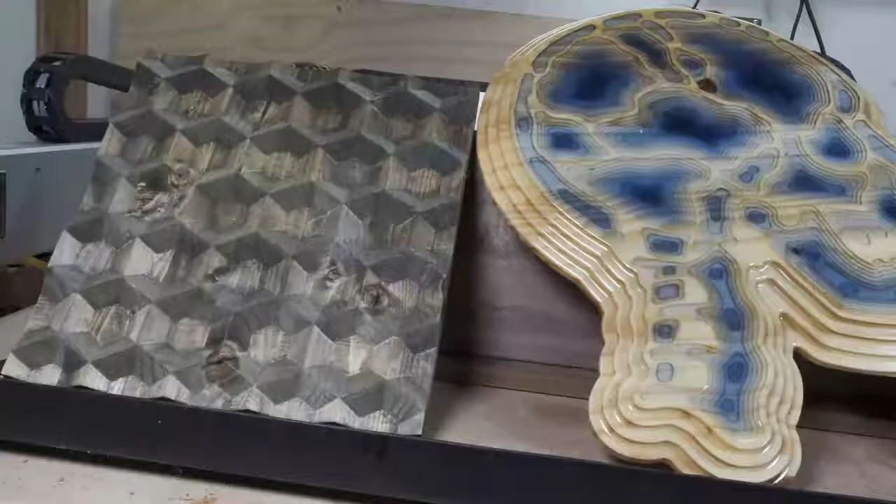How do you design stuff like this, program the CAM software, and mill it all with Alibre Workshop? Let's get into it. If you want to skip, design's at 16 seconds, CAM's at 7 minutes, and milling is at 14:35.

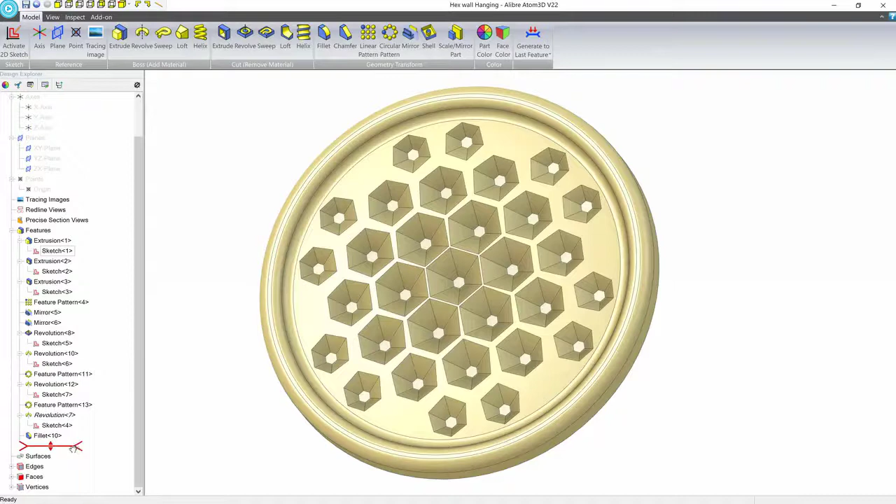Here we have our finished art piece, and we're going to go ahead and roll back in time to show you how you might go through the steps to make something like this. We'll drag the dog bone to the very first extrusion. And while we do this, we want to make sure that we have sketches and reference geometry turned on. So we'll go to the View tab and we'll turn both of those on.

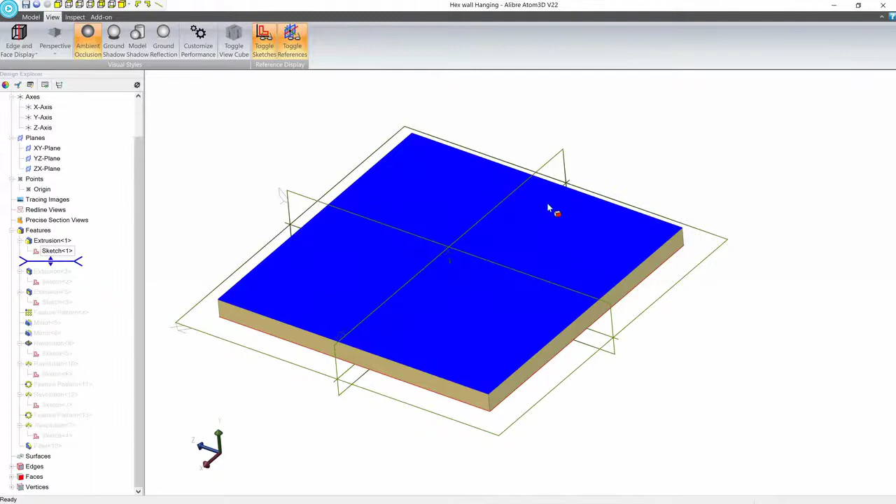So the first thing that I did is I made a representation of my stock. And I don't normally do this, but because I wanted to maximize the size of the art piece, and I didn't know how close I actually wanted it to get to the edge, I figured it would be a good exercise to just model it. The next sketch that I did was actually creating the blank for the art piece itself. And this gave me the ability to kind of gauge how far off I wanted it to be, because I'm not making this to a defined size, I'm just making it to where it looks good to my eye.

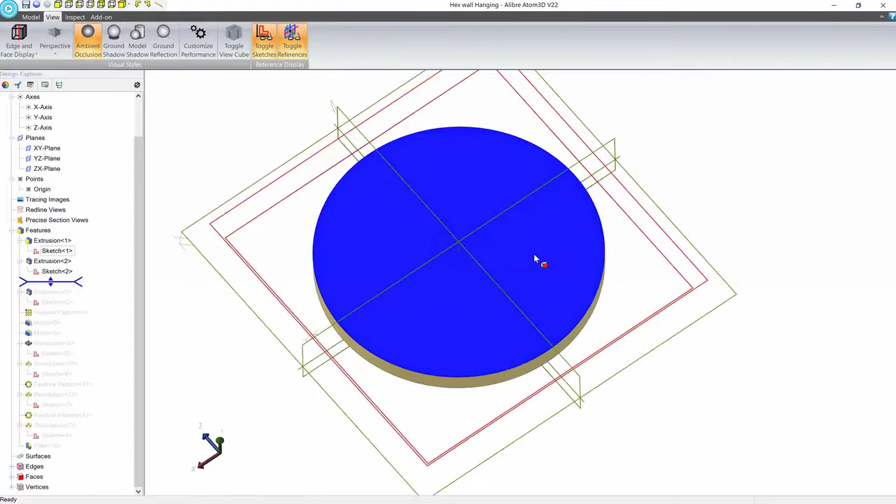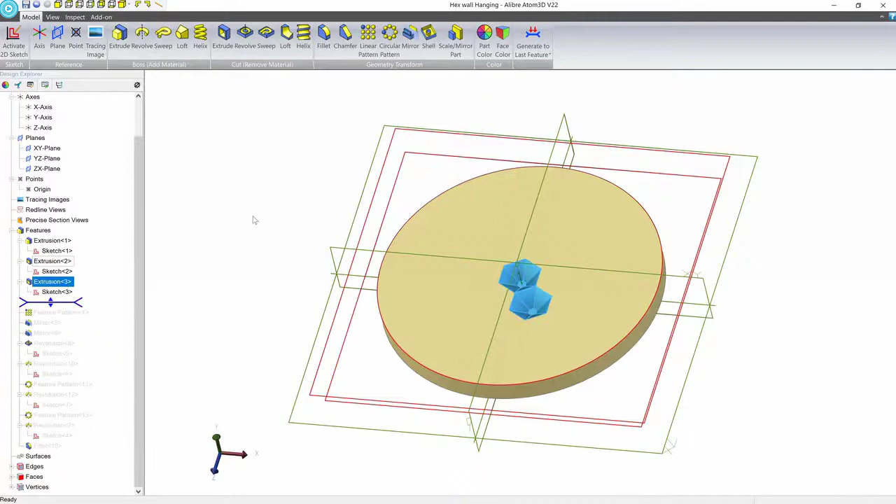So to make this, I just created a circular sketch at a defined offset of 0.8 inches from the edge of the stock. Then I made another square around it, such that when I did an extrude cut, all of this excess material between the two profiles would be deleted. At this point, we start to get into some interesting geometry. So to do this, we basically create two hexagonal profiles. And we can create a little bit of reference geometry using this little triangular reference line setup, such that we can offset these in a way that when we pattern them later, they'll all be perfect.

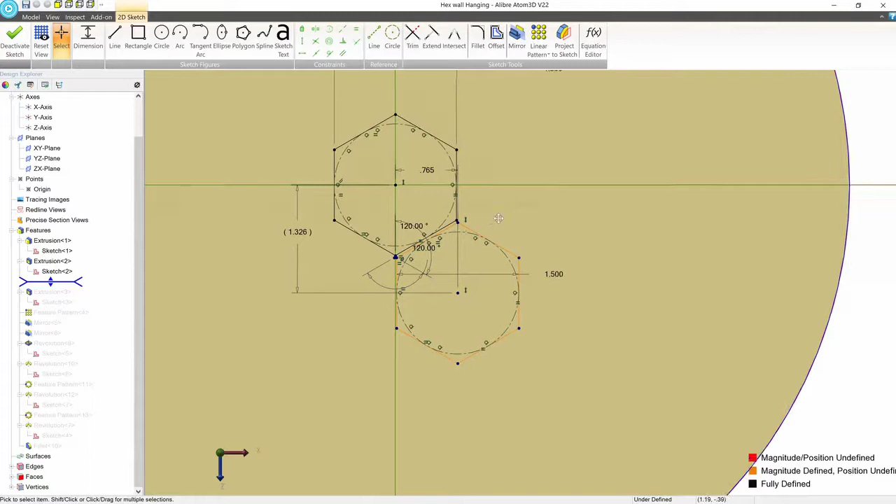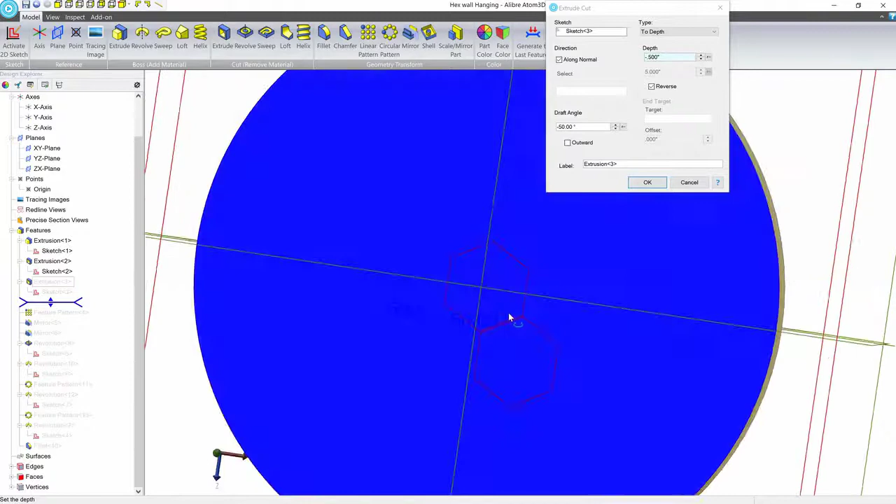Now, when we did the extrude cut for this, we didn't just do a basic cut. What we did was we added a draft angle. And the draft angle can basically take the profile and it'll go inwards or outwards. And we can see that we have -50 here. And so that's going to bring the profile inwards as it cuts. And we can see that we have a little preview at the bottom. So you can play with these angles and the depth and things like that to kind of get the appearance that you want.

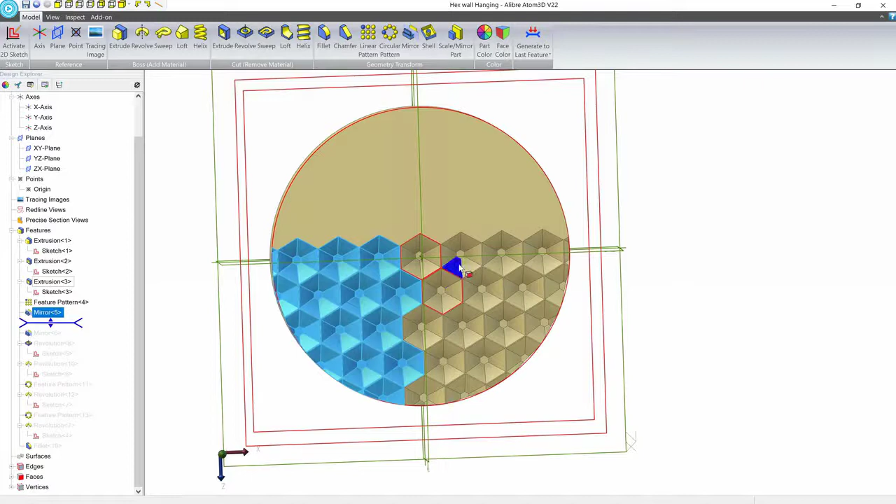Now what we want to do is make this happen everywhere. So we're going to go to Pattern, and we can see that we're starting to get some really interesting geometry. But it's only on 1/4 of the object. And we've done this in such a way that it's pretty easy to mirror. So we're going to mirror both the original feature and its pattern across the axis. And then we're going to do that again for everything. So now we've got this really cool object that we can mill. And we were trying to think of a way to make it a little bit more interesting. I mean, this is pretty cool already, but

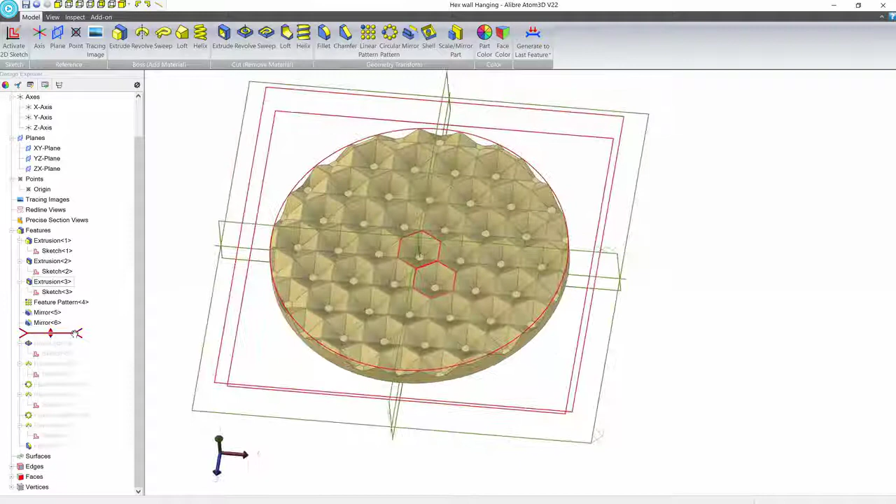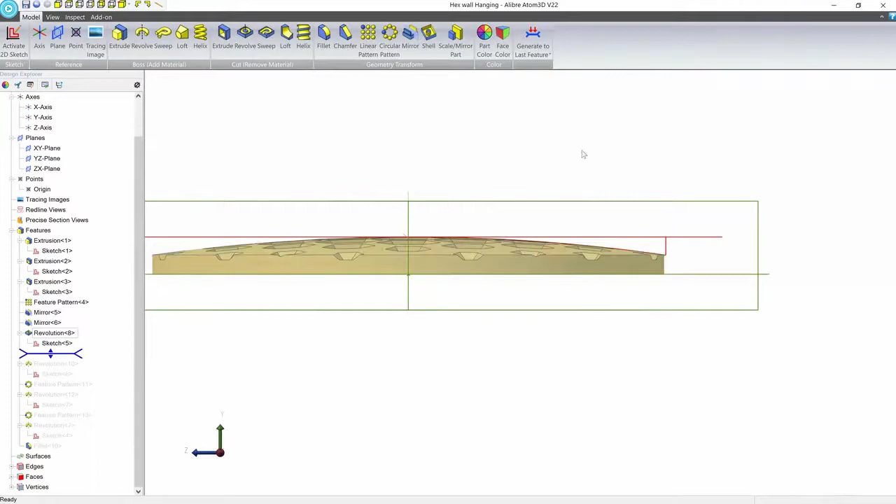what we did was created a sketch that was basically an arc. And the arc would start at the center, and it would slowly cut away material as it goes. So we're cutting everything in between this little profile here. And the result of that is when we look at it from the side, we get this beautiful domed appearance. And the other effect of that is that due to the way it interacts with the geometry, we get this interesting spacing effect as well, which I thought was pretty cool. So I decided to keep it.

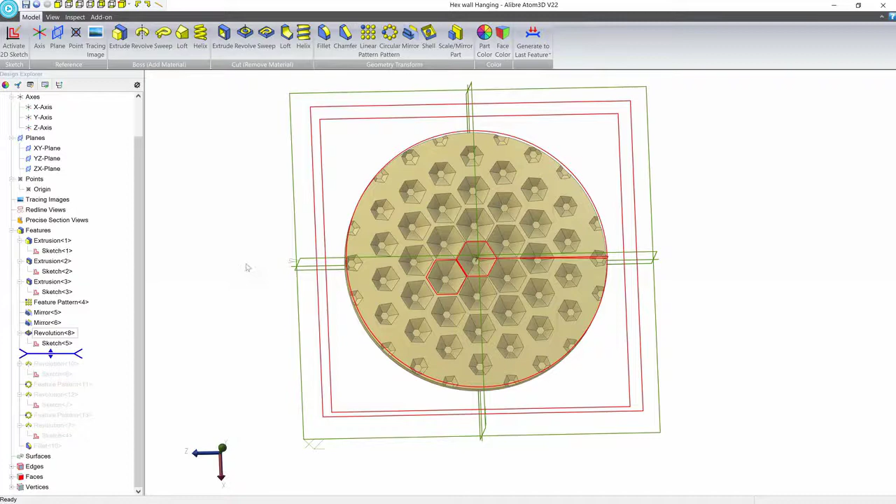One thing I did know, though, is that on the edge, I wanted to have a lip. And some of this was a little bit too busy. I thought it would be cool if we could separate out some of these from being in the model. The way I decided to achieve that was to do something very similar to the way that we cut the model to get this dome shape, but just kind of in the reverse. So what I did there to get rid of this first one, which is the equivalent of these guys, is we just created another sketch.

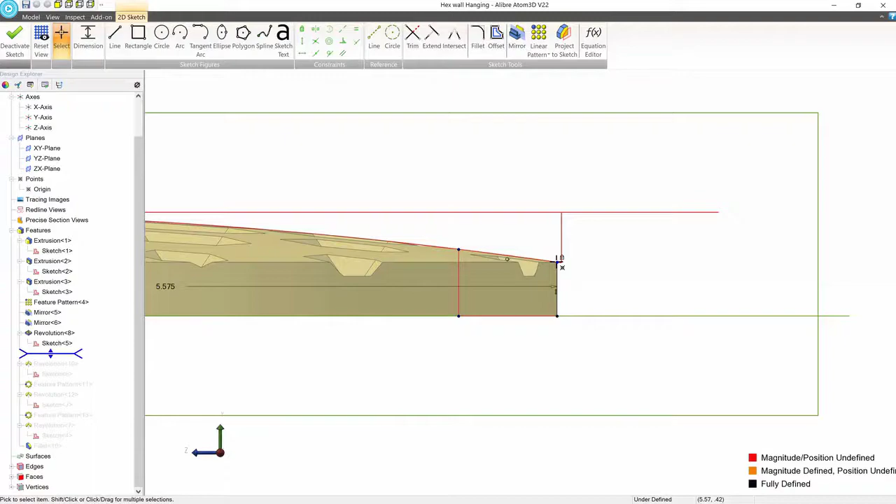And instead of this first sketch, which we used to cut the top of this, I copied it and pasted it onto this sketch and removed this part of a line and this part of a line and this part of a line. And I just made these extra lines go down. So now we have a closed profile here. And instead of doing a revolve cut, we'll do a revolve boss, which adds material. So our strategy is to have this profile, which exactly matches up with the top of this dome. And we're going to add material in this direction and in this direction so that we can get rid of these three.

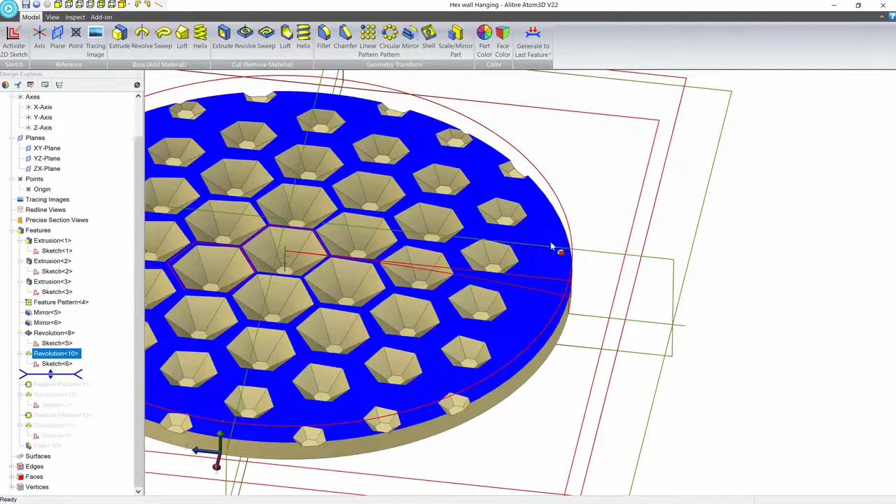Now that we've cleared out this section, we can take advantage of symmetry to do the same thing on all of the others. We'll just do a feature pattern here of that revolution that we made. And now we've cleared out most of the edge.

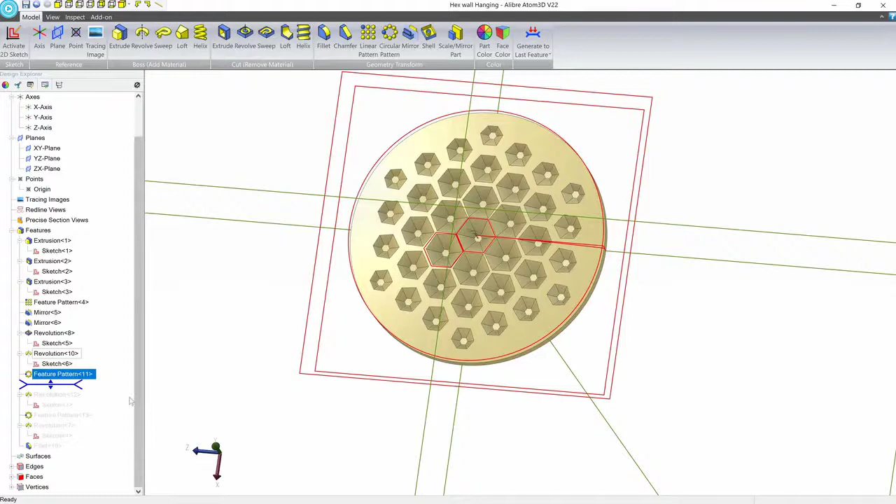We still have a little bit more clearing out to do. These guys here on each of the corners, I want to get rid of as well. And we're going to do the exact same process to do that. So here we can see we've created another sketch very similarly, but it's just offset a little bit. And it's targeting this one specifically. So we'll deactivate sketch mode and the feature will evaluate, and we can see that that one is now gone.

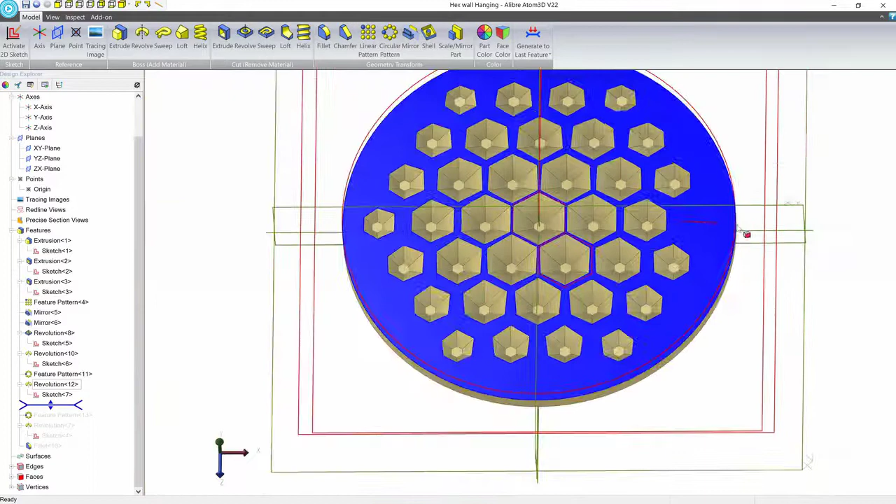And in the same way that we did last time, we're just going to use a feature pattern to make all of the other ones gone. The last step that we'll do is we'll make a revolve with a nice little profile to put a lip on the object, and then we'll add a fillet. And there we go. That is pretty cool.

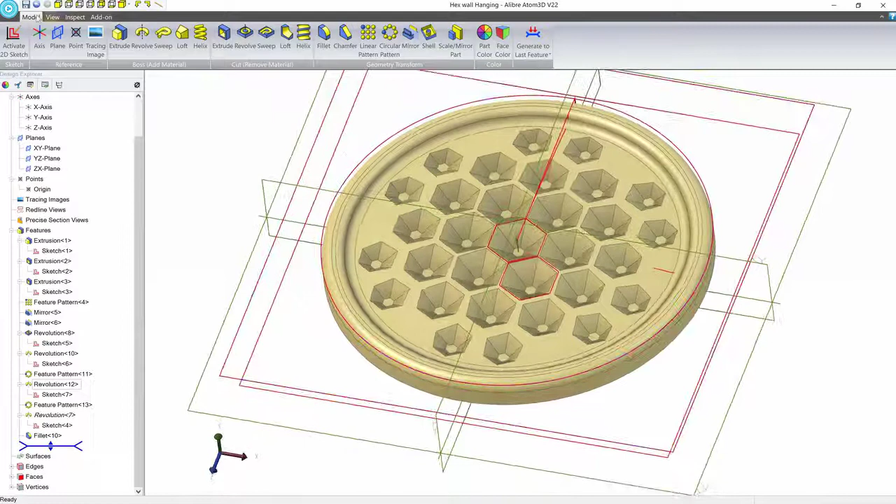And we can look a little bit deeper at what's going on by going to the Inspect tab and activating a dynamic section view. Let's turn off our reference planes with Control-Shift-P and our sketches with Control-Shift-K. And we can see that we can drag this. And we get this nice, beautiful, sweeping profile that should really catch the light in the right circumstances after we mill it and hang it on a wall. It's going to be gorgeous.

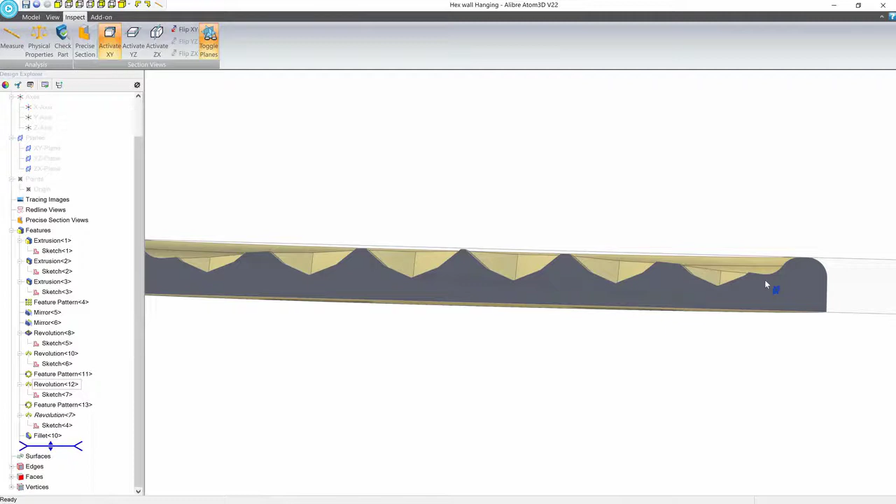Now that we're at this stage, we are ready to go into CAM software. So let's go ahead and export this as an STL. Now that we're in MeshCAM, the first step, as usual, is going to be to load the STL file that we just made. This is called hexwallhanging.stl. We'll bring it in and we can see that it's flipped upside down.

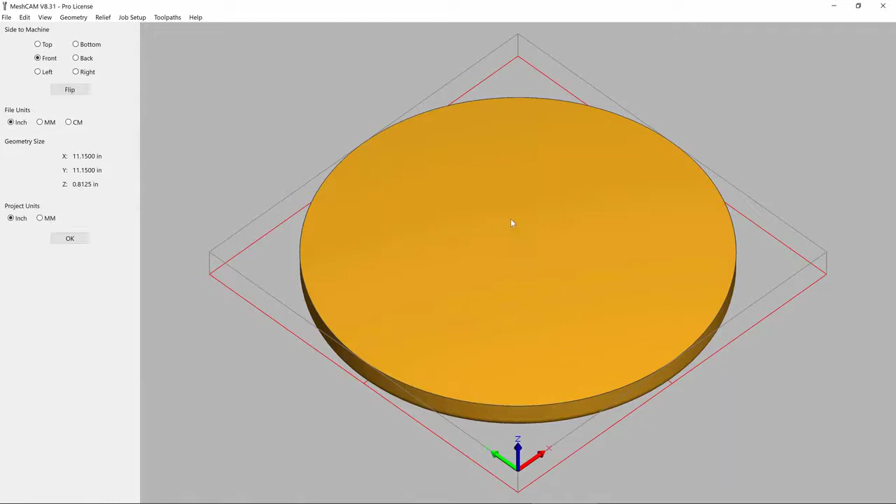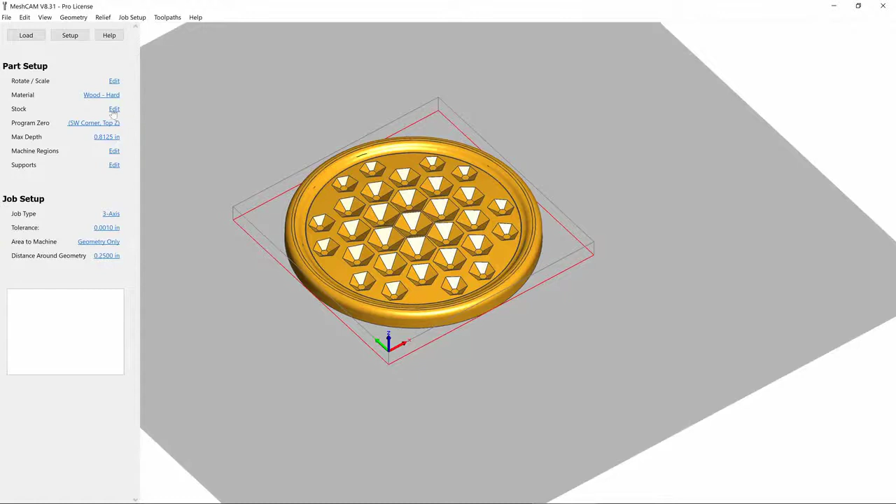And the reason it's flipped upside down is because when I modeled it, I wasn't paying a ton of attention. And I probably should have modeled the Z positive direction to be the top. But no problem. We'll just click flip and we're good to go. Let's go ahead and accept the change. And as usual, the first thing we want to do is to define our stock. We happen to know that our X and Y is going to be 12.75 because that's what we measured our stock piece to be. And the thickness is going to be 0.813.

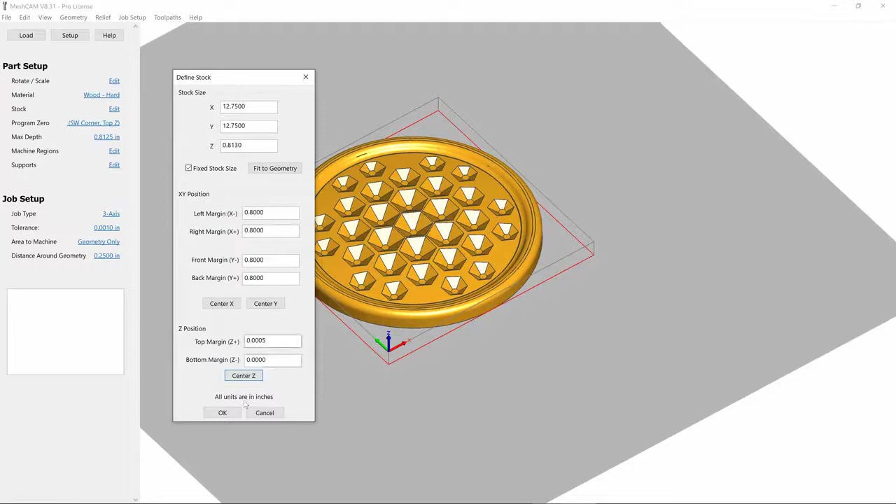We'll do a fixed stock size, bottom margin of 0 as usual, and that's just going to place the model at the bottom of the stock. So things are looking pretty good. If you can remember the modeling session, you can see that these are about 0.8 off the stock, so it's looking all consistent. The next step that we want to do is going to be to add supports.

And this is going to be a pretty big object. We're going to be using big mills. We're going to go fast. So we want to make sure that we have a reasonable support structure so that when we start to cut things out, it doesn't start moving around on us. So in this case, we're going to go 0.4 by 0.4. We'll place it in the middle of the geometry and we'll press OK. And let's just make 4 of these guys and done.

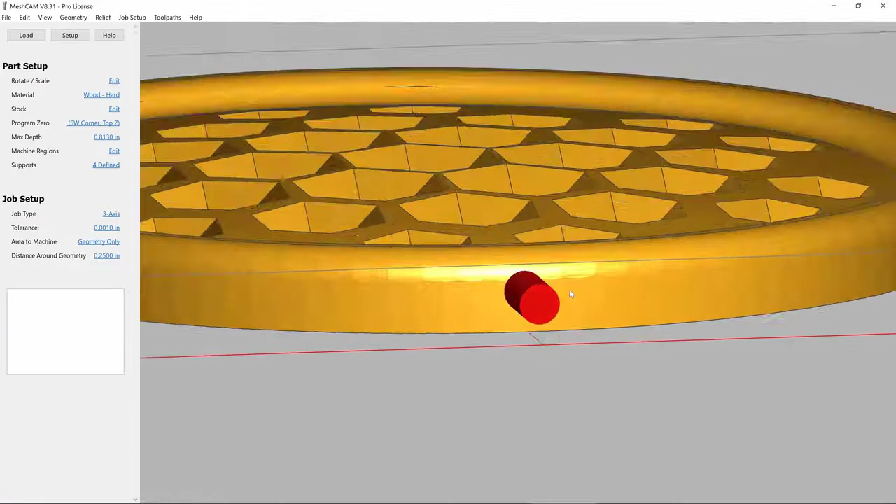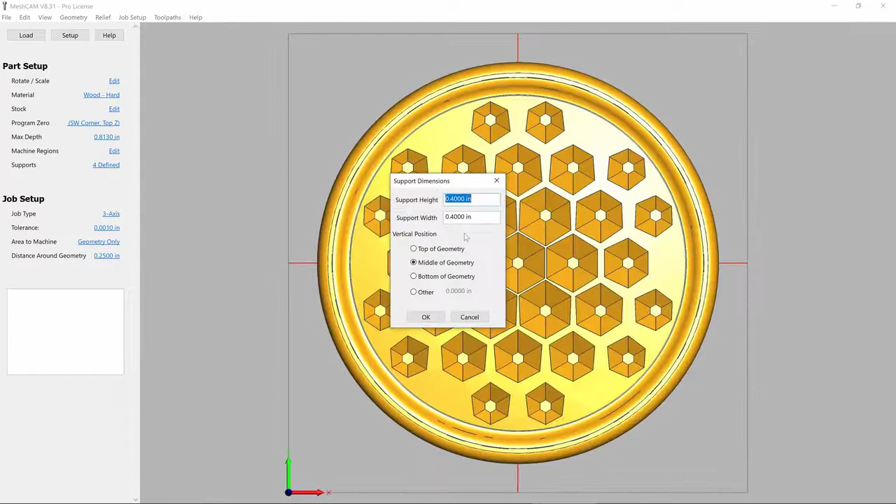So we can see that we might run into a little bit of a problem here because, it's not a huge deal, but the very top of these supports is kind of running into this curved part of the fillet. And it's something that some sanding will fix. But why make your life hard, right? So let's go back into our supports. We'll delete all of these guys. And maybe we'll just put it at the bottom of the geometry.

There we go. So now we're totally clear of this nice fillet, and we only have to worry about the curvature of this when we get into post-processing later. So cool. Because MeshCAM has automatic toolpath parameter generation, we want to take advantage of that. So we want to make sure that our material is defined correctly as wood.

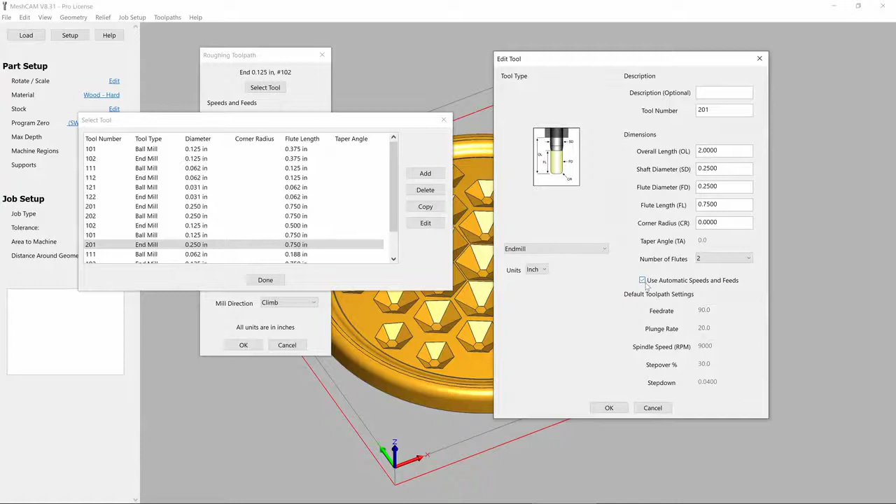And now when we go into toolpaths, roughing, we're going to select our end mill. And we're going to be using 1/4 inch end mills to do the roughing here. So we'll select tool 201. And just because when we created this tool, we're going to turn on use automatic speeds and feeds here. And now every time we insert this end mill into a profile, it's going to look at the material, it's going to look at what it's doing, and it's going to automatically select appropriate feed rates, plunge rates, and other values.

Now, of course, you can modify these. These are just suggestions. But if you know your machine and you know you can go faster or cut deeper, certainly do that. Let's go ahead and press OK. And let's calculate our toolpaths. Now that we have this calculated, let's do a quick simulate.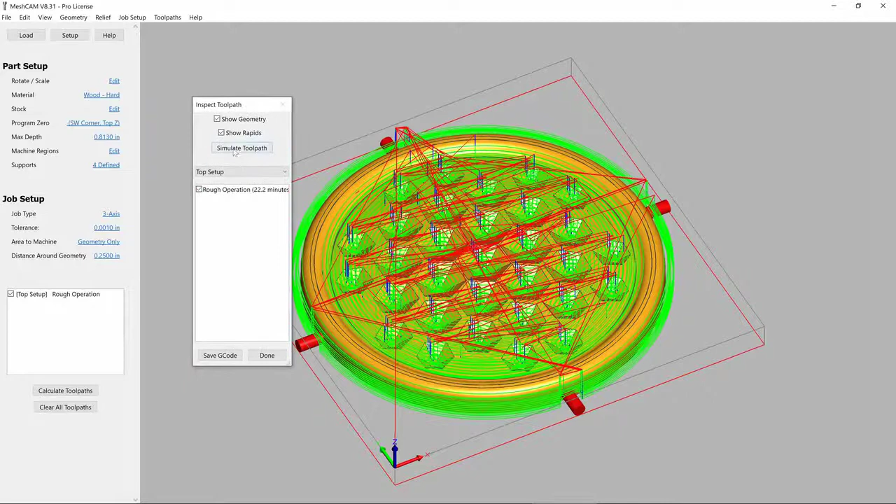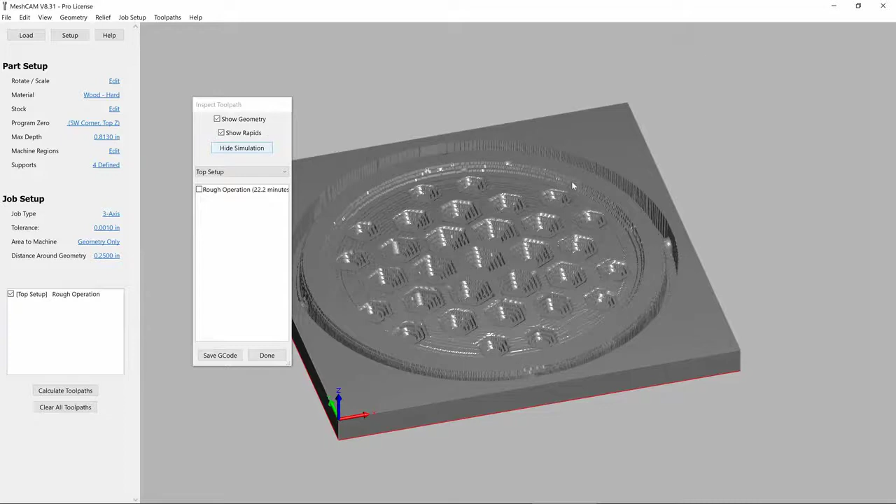And we'll turn off the visibility of the toolpath, and we can see that this is what we're left with. So the point of roughing toolpaths is to take as much material as possible and get pretty close to the actual geometry, so that when we do a finishing toolpath later, that toolpath doesn't have to cut through a whole bunch of stuff. And we want to do this as quickly and aggressively as our machine will allow. Anyway, this is starting to look good.

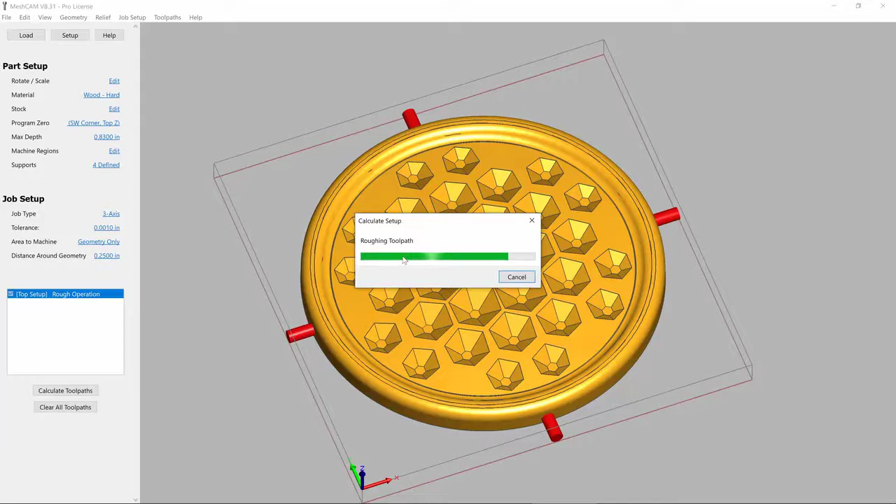And the only thing that we might want to change here is we notice that we're not going quite all the way through the material. And wood has variation, so maybe it'll go through in some places, maybe it won't, because we're right on the edge. So we can change the max depth that we're going to machine to be maybe 0.83, a pretty minor adjustment. But what that'll do when we calculate the toolpath again is take care of any possible variations in the wood. If maybe part of it's thicker than something else, or our table isn't perfectly flat, it'll just cut through just a little bit deeper than it expects to.

Now if we were to simulate this, we can see that we're actually cutting through, and this will make it easier to release on the table and have less post-processing at later steps. Now that we have our roughing operations done, let us blaze ahead with our finishing operations. We're going to use 2 finishing operations for this object because the geometry requires it. It doesn't require it, but it makes it a whole lot easier for us.

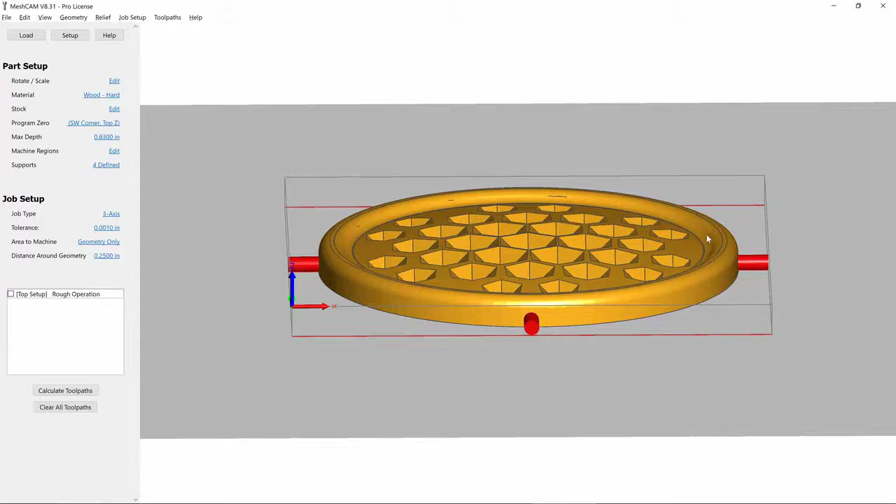So for flat areas like this, with a little bit of curvature or even just flat, this is great for a parallel finish toolpath. So that's what we want for the top of this. And for things with walls, like these insets or the sides of this fillet, those are great for waterline toolpaths. So let's go ahead and set up a waterline finishing. And we're going to use a 1/4 inch ball mill to do this. We're going to set our threshold angle to be 10. And what that's going to do is just limit the waterline to be the areas that we desire. So let's go ahead and do that.

And now finally, we'll use a parallel finishing toolpath. Same thing with the ball mill. We're going to limit the toolpath to shallow areas and set a threshold angle. And what that's going to do is make sure that this toolpath only stays on the top and on the bottom here, and perhaps even on the top up here. So let's go ahead and press OK, and let's calculate that and see what we get.

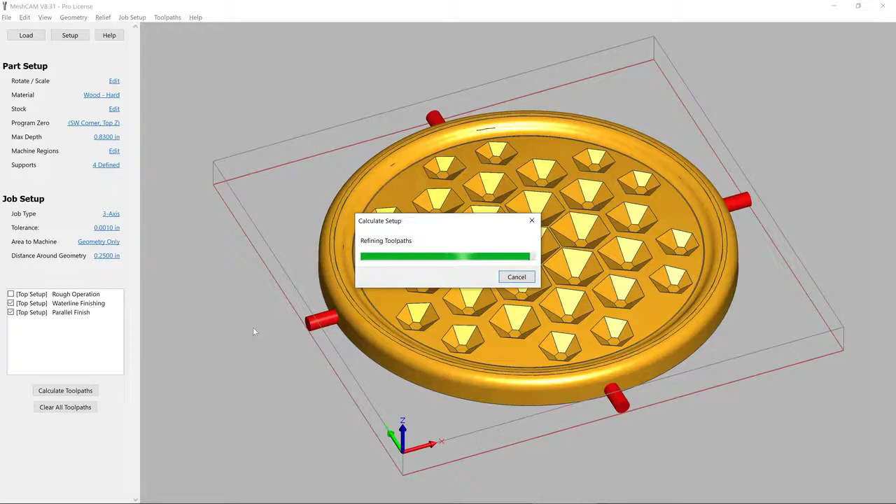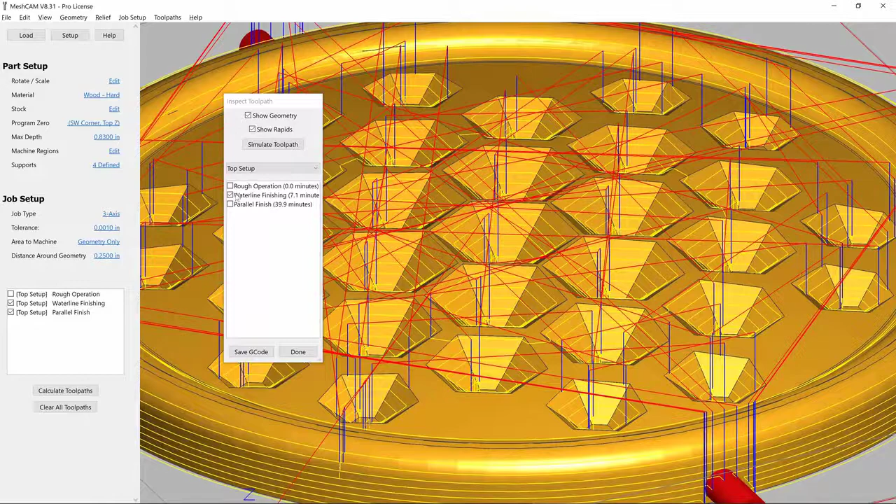Okay, so if we look at only our waterline finishing, we see that it's in the right place. It's only targeting these areas that we want and on the sides, but it's a pretty aggressive finishing operation. And it's not going to leave us with a very good surface finish. You can see how far away these are from each other. So we'll modify that in a second. Let's go to parallel finish. And we can see, as we desire, that it's only going on the top surface of this object. Cool. So let's go ahead and just modify our waterline.

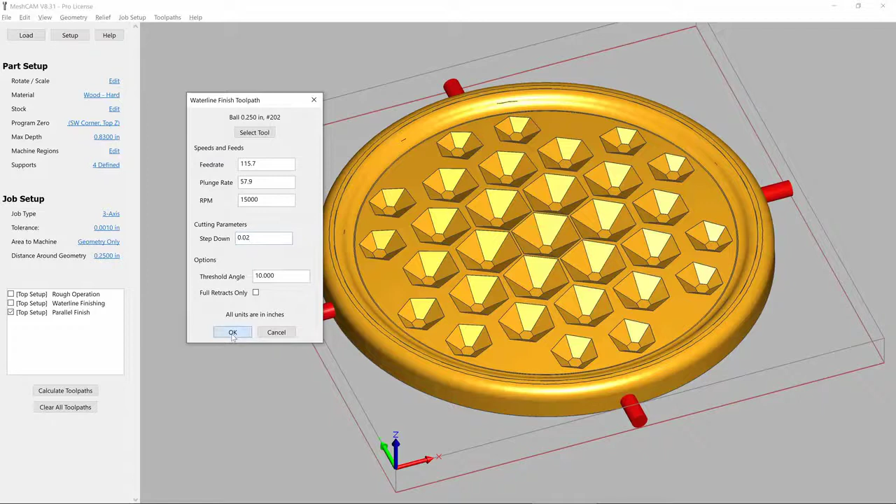And the reason that it's doing that is because the step down is pretty aggressive here. Let's change that to 0.02. This may make it take a little bit longer, but you know what? I don't want to be sanding inside here. I'd rather it come off the machine as nice as possible. So let's calculate that toolpath again.

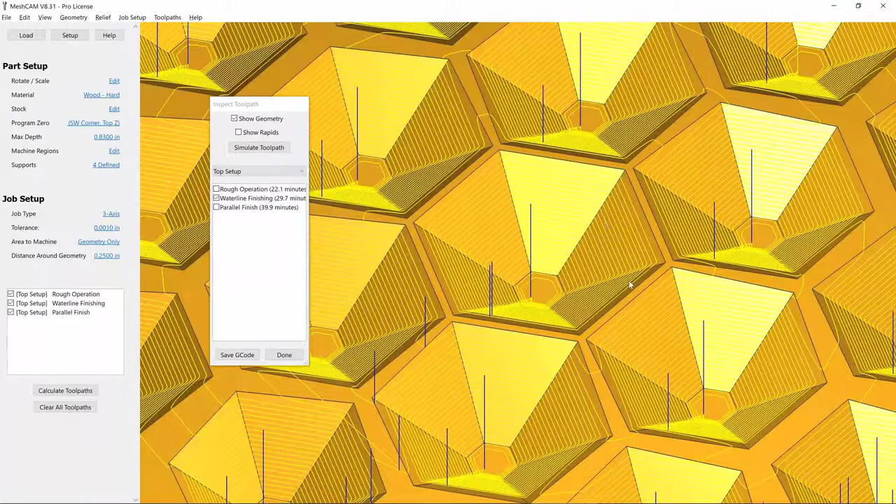So here we have everything calculated. Let's turn off our rough and our parallel finish. And we can see that our waterline, let me turn off rapids too. Our waterline now has a much finer gradation. It should produce a much better surface finish right off the table. Sanding in here is just going to be a huge pain in the butt. Anything we can do to avoid that, we want to do.

All right, so we have our 3 operations. We'll do a final simulation. Turn off all the toolpath visibility, and we are looking really nice. It's time to save this G-code and head over to the machine.

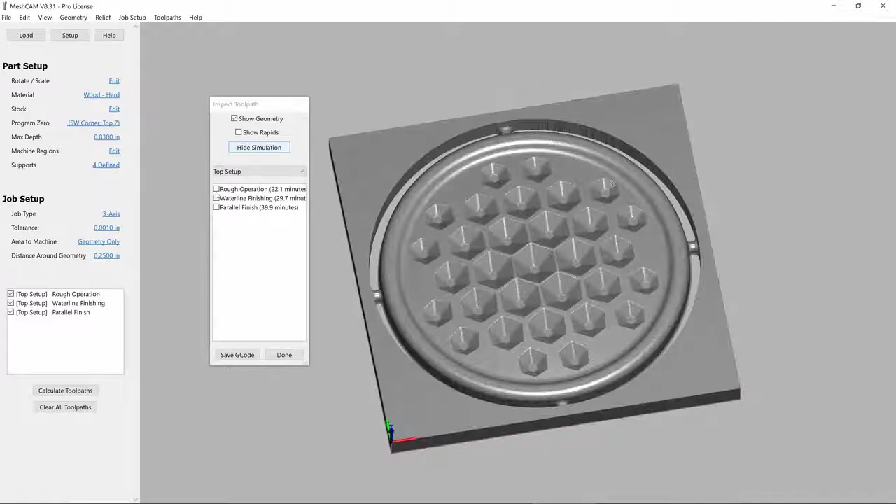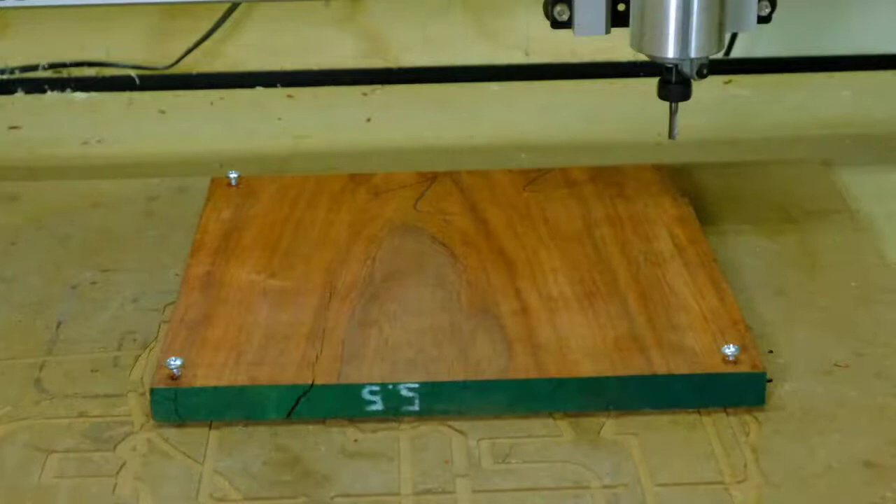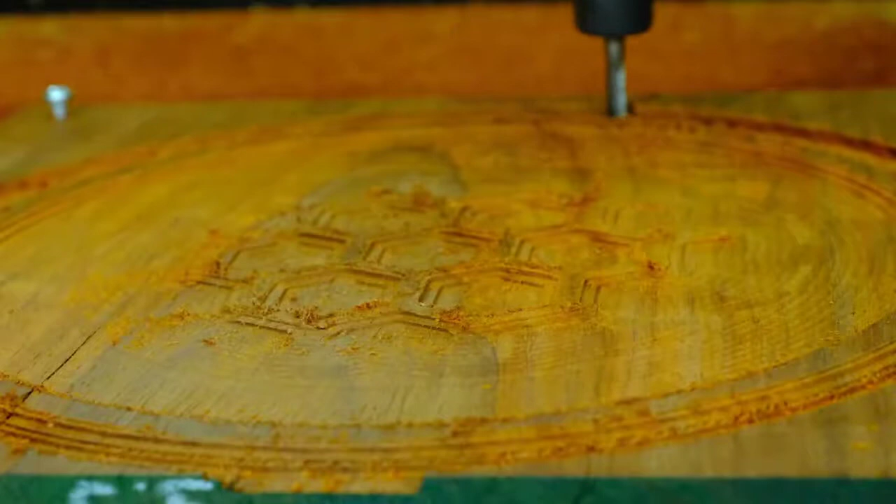We just zeroed the machine at the northeast or top right corner because we didn't want to run the risk of running into some of these other work holdings with the default bottom left corner. The first operation that we're seeing here is the roughing pass, and again this is designed to remove material and expose close to the surface of the actual model to a final finishing pass. We're starting to go deeper and deeper into the part, and we can start to see the geometry really become exposed as we drill further and further down.

We move now into a finishing pass where we can start to see that the small gradations in our waterline finishing are really paying off because the surface finish from these hexagons looks really nice. As we start to finish up the part, we can see that the rest of the part has had its parallel toolpath already executed, and we can start to see the fillets and the nice curvature that we were going for earlier. We're really close to this part being done.

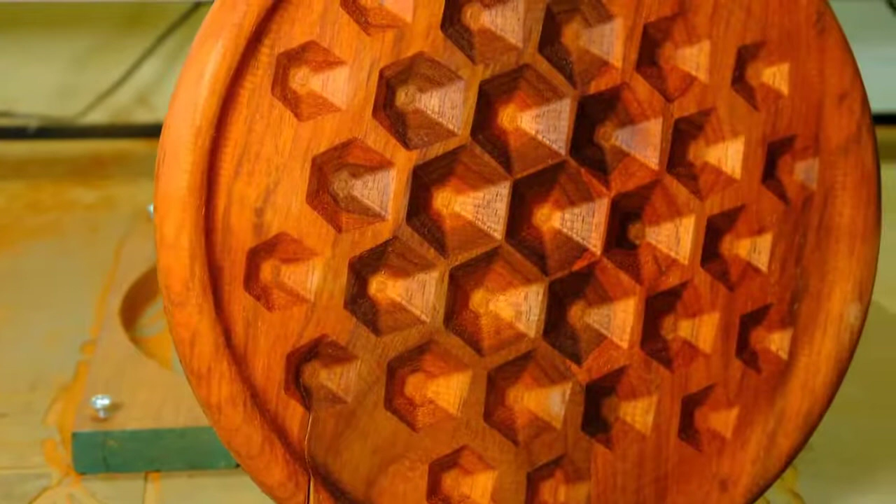And it is absolutely stunning. With a little sanding and some staining, this part turned out absolutely gorgeous. It's going to be hanging on the wall, it's going to catch light beautifully, and it's going to be a showpiece. And we made it all in Alibre Workshop.